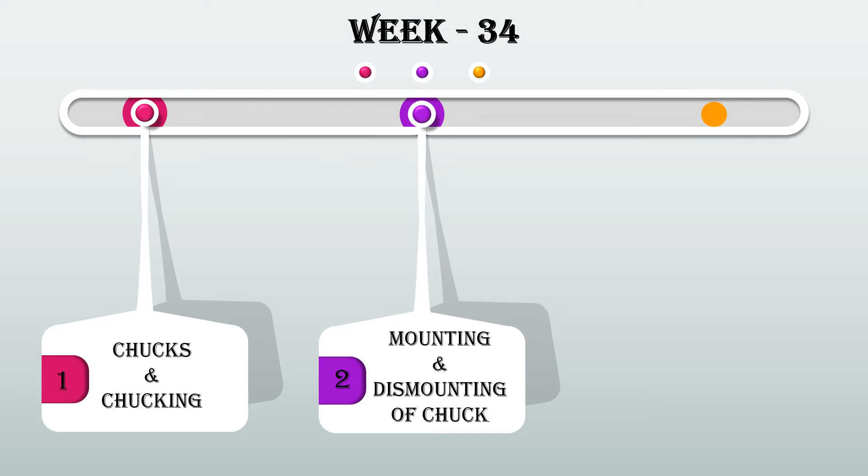In week number 34, we are going to discuss the topics of: 1. Chucks and chucking, 2. Mounting and dismounting of chuck, and last, faceplate, drilling, and boring. In part 1, we are going to see chucks and chucking only.

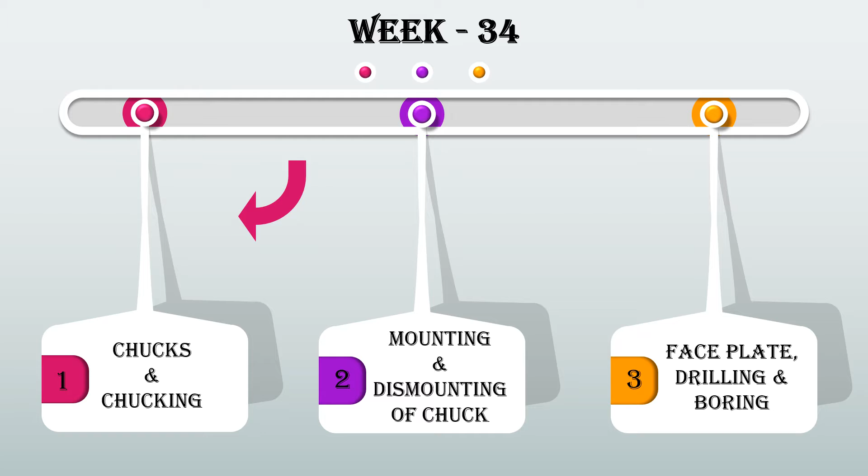Let's see the objectives of this topic. You shall be able to state the constructional features of a 4-jaw chuck, name the parts of a 4-jaw chuck, state the merits and demerits of a 4-jaw chuck, and state the uses of thread cleaner.

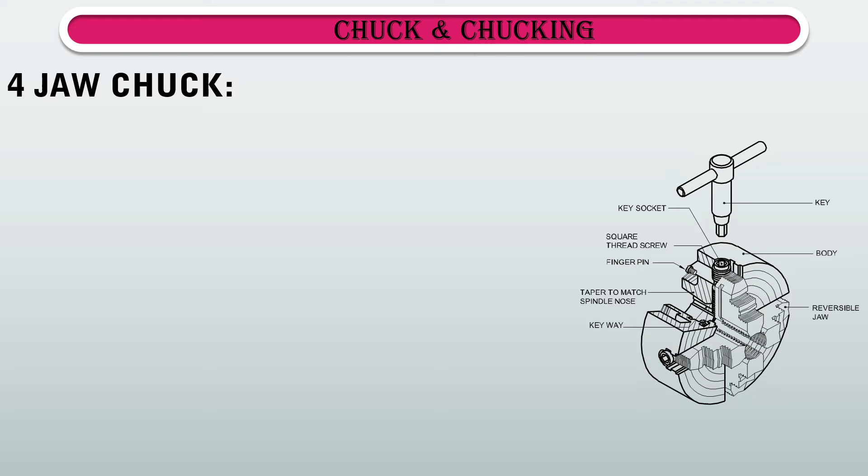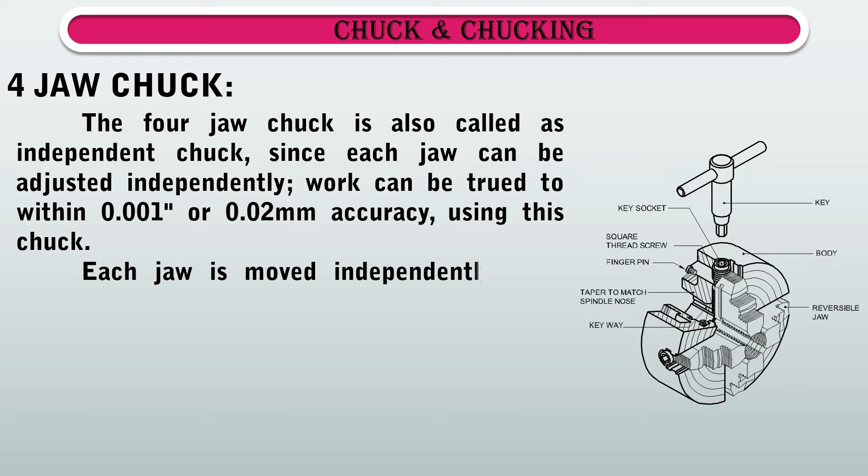First, we are going to see the description of 4-jaw chuck. The 4-jaw chuck is also called independent chuck, since each jaw can be adjusted independently. Work can be trued to within 0.001 inch or 0.02 millimeters accuracy using this chuck. Each jaw is moved independently by a square thread screw. The jaws are reversible for holding large diameter jobs.

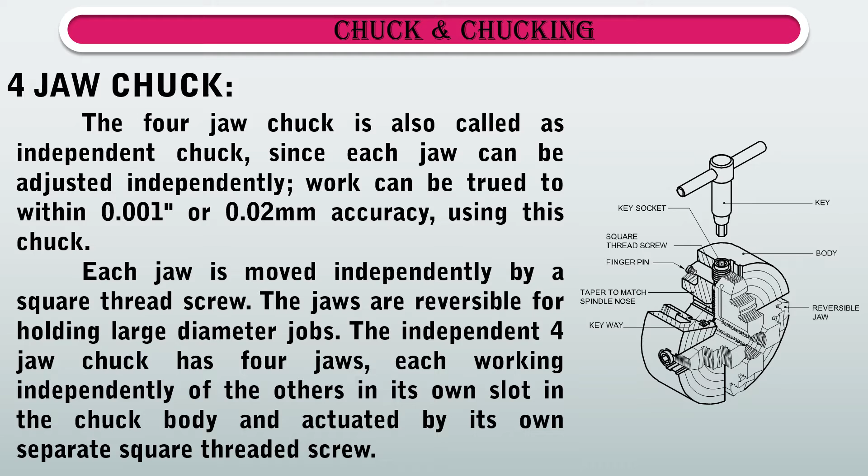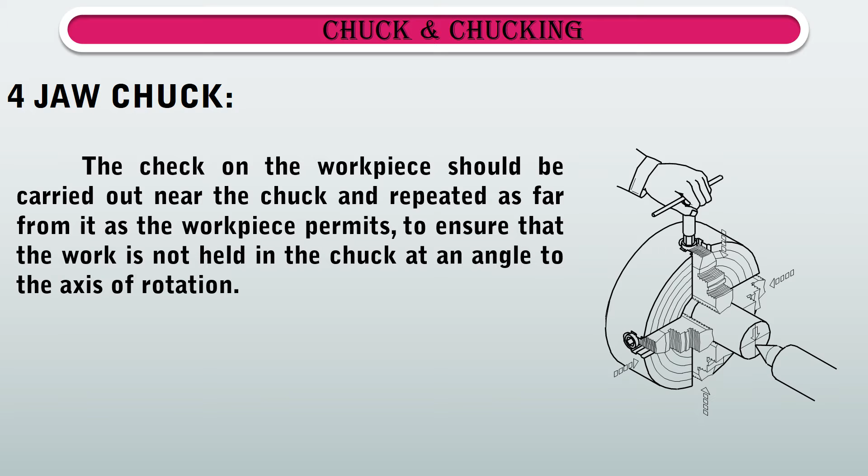The independent 4-jaw chuck has 4 jaws, each working independently of the others, in its own slot in the chuck body, and actuated by its own separate square threaded screw. The check on the workpiece should be carried out near the chuck, and repeated as far from it as the workpiece permits, to ensure that the work is not held in the chuck at an angle to the axis of rotation. The independent adjustment also provides the facility of deliberately setting the work off center to produce an eccentric workpiece.

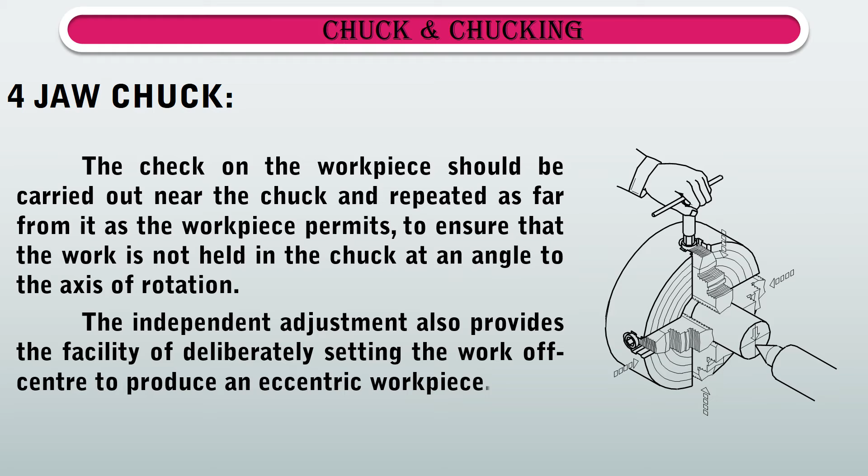Next, we are going to see parts of 4-jaw chuck. 1. Back plate. 2. Body. 3. Jaws. And 4. Square threaded screw shaft. Now, briefly see the parts, one by one.

First one is back plate. The back plate is fastened to the back of the body by means of Allen screws. It is made out of cast iron or steel. Its bore is tapered to suit the taper of the spindle nose. It has a keyway, which fits into the key provided on the spindle nose.

There is a step in front, on which the thread is cut. A threaded collar, which is mounted on the spindle, locks the chuck by means of the thread, and locates by means of the taper and key. Some chucks do not have back plates.

Second one is body. The body is made out of cast iron or cast steel, and the face is flame hardened. It has 4 openings at 90 degrees apart to assemble the jaws and operate them. 4 screw shafts are fixed on the periphery of the body by means of finger pins. The screw is rotated by means of a chuck key.

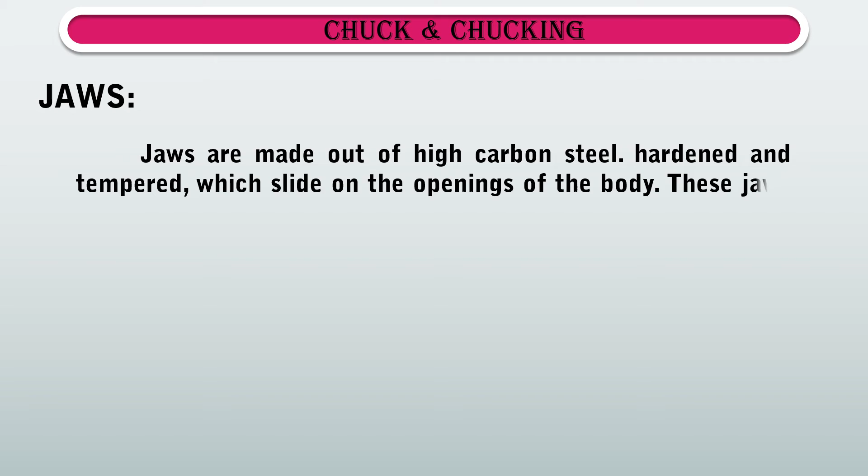Third one is jaws. Jaws are made out of high carbon steel, hardened and tempered, which slide on the openings of the body. These jaws are reversible for holding hollow work. The back side of the jaws are square threaded, which help in fixing the jaws with the operating screws.

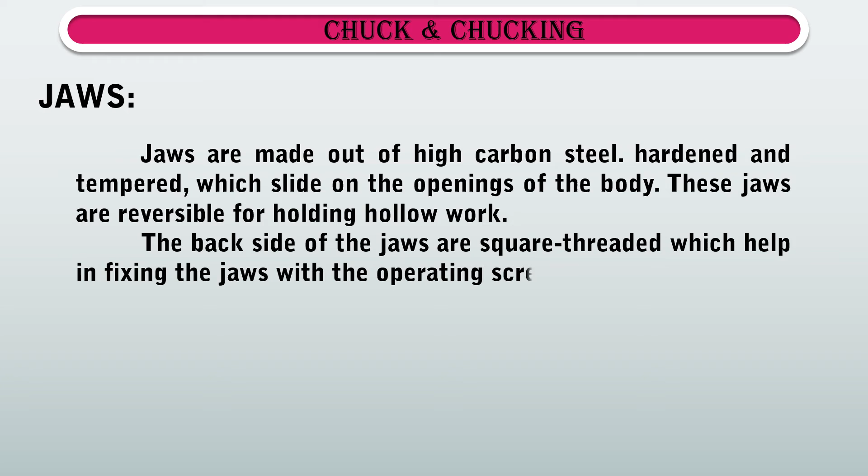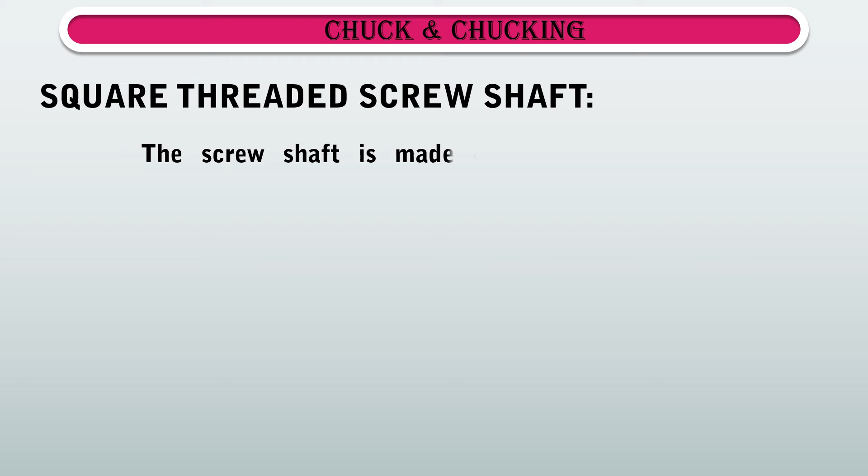And the last one is square threaded screw shaft. The screw shaft is made out of high carbon steel, hardened, tempered, and ground. The top portion of the screw shaft is provided with a square slot to accommodate the chuck key. On the body portion, a left-hand square thread is cut.

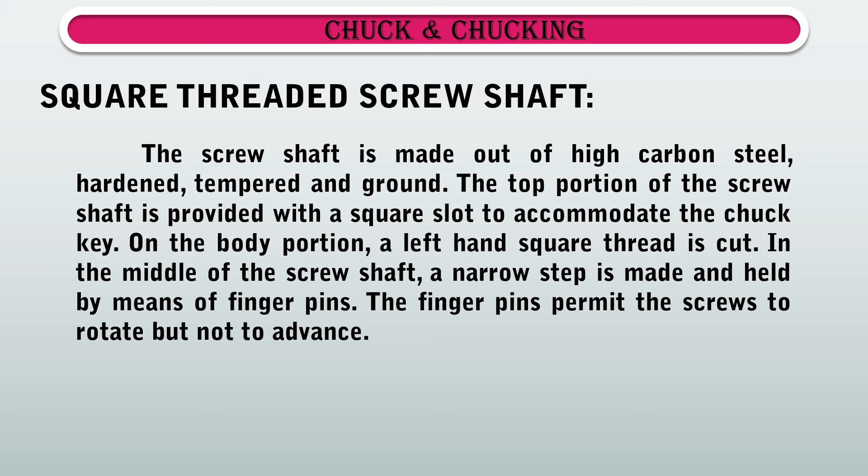In the middle of the screw shaft, a narrow step is made, and held by means of finger pins. The finger pins permit the screws to rotate, but not to advance.

Let's see the specification of chuck. To specify a chuck, it is essential to provide type of chuck, capacity of chuck, diameter of the body, width of the body, and last, the method of mounting to the spindle nose.

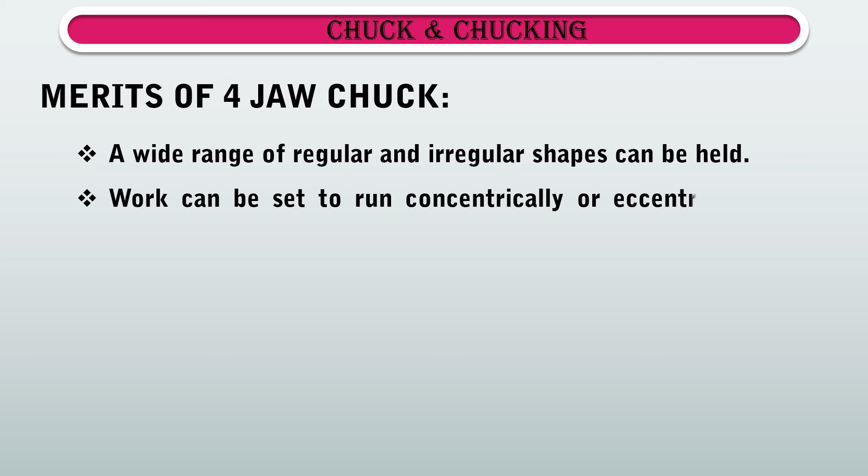Now, we are going to see merits of 4-jaw chuck. First, a wide range of regular and irregular shapes can be held. Second, work can be set to run concentrically or eccentrically at will. Third, it has considerable gripping power, and hence heavy cuts can be given.

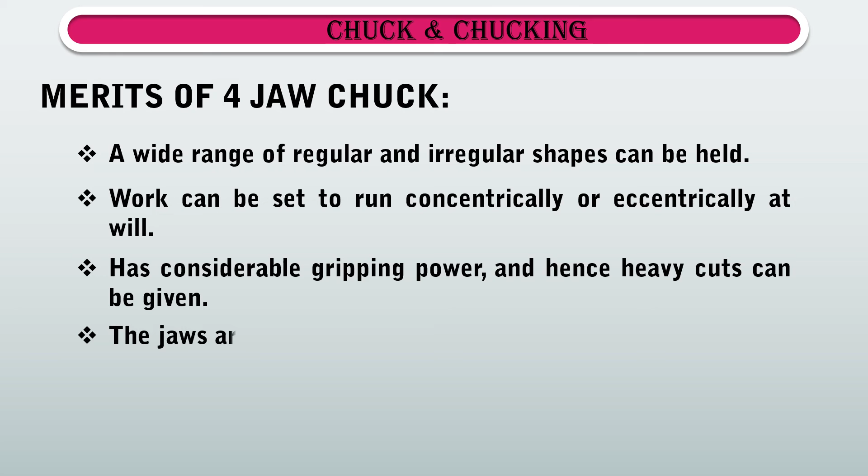Fourth, the jaws are reversible for internal and external work. Fifth, work can be readily performed on the end face of the job. And sixth, there is no loss of accuracy as the chuck gets worn out.

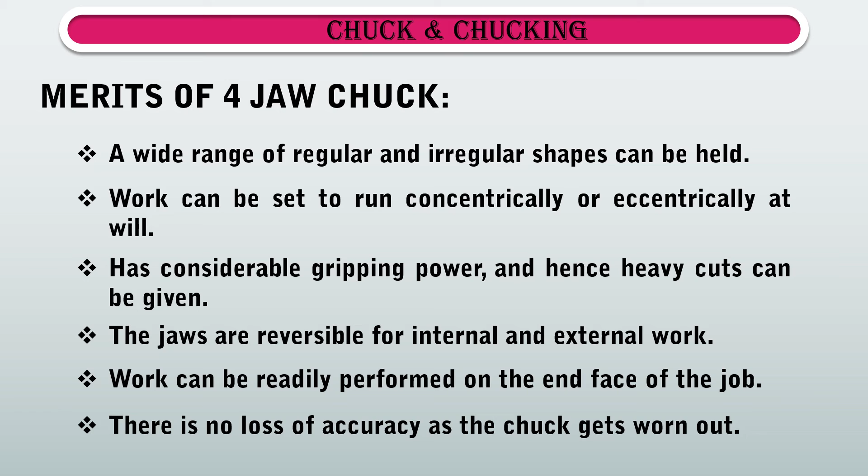And then, we are going to see the demerits of 4-jaw chuck. First, work pieces must be individually set. The gripping power is so great that fine work can be easily damaged during setting.

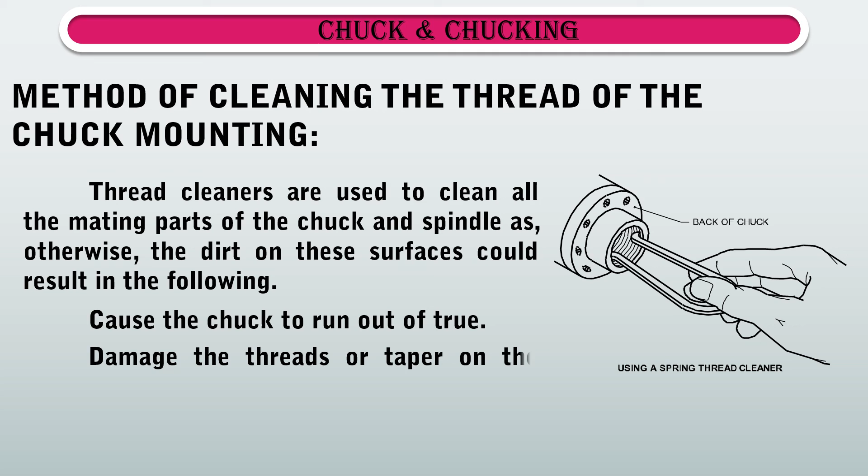And last, we are going to see method of cleaning the thread of the chuck mounting. Thread cleaners are used to clean all the mating parts of the chuck and spindle, as otherwise, the dirt on these surfaces could cause the chuck to run out of true, or damage the threads or taper on the spindle or chuck.

Yes, you are right. The answer is B. Reversible jaw.

With this, we have completed the topic of chucks and chucking in part 1 of week number 34. I will be back with the topic of mounting and dismounting of chucks in part 2 of week number 34.